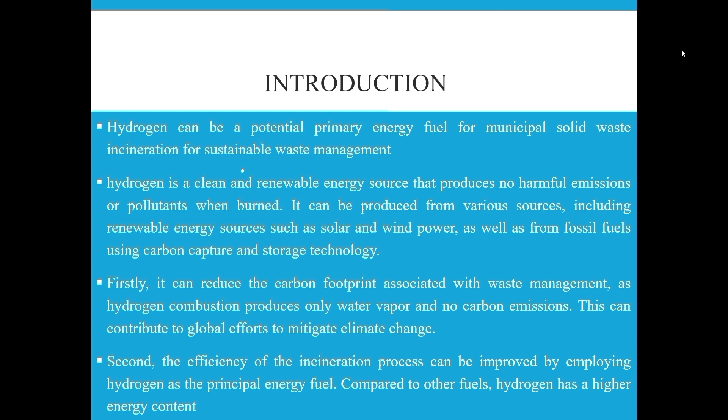Firstly, it can reduce the carbon footprint associated with waste management as hydrogen combustion produces only water vapor and no carbon emissions. This can contribute to global efforts to mitigate climate change. Second, the efficiency of the incineration process can be improved by employing hydrogen as a primary energy fuel. Compared to other fuels, hydrogen has higher energy content.

Hydrogen provides more energy for each unit of fuel used. As a result, there may be greater ability to recover energy from municipal solid waste and a lesser need for fossil fuels. Managing solid waste is one of the most important tasks for municipalities and organizations.

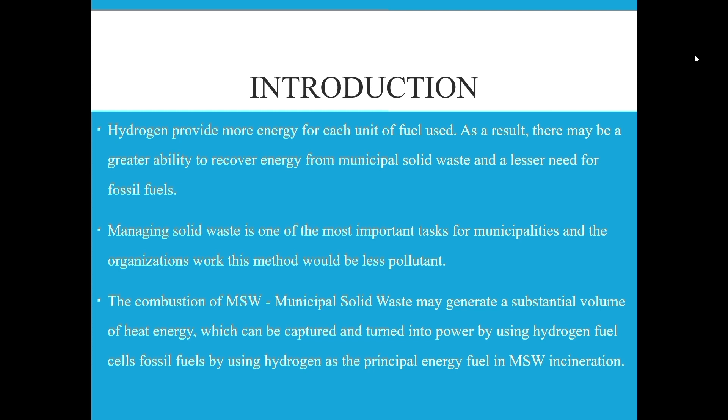This method would be less pollutant. The combustion of municipal solid waste may generate a substantial volume of heat energy, which can be captured and turned into power by using hydrogen fuel cells, replacing fossil fuels by using hydrogen as a primary energy fuel in MSW, that is municipal solid waste incineration.

History of technology. The history of this idea can be traced back to the early 2000s, when the Indian government recognized the need for sustainable waste management practices and began promoting the use of alternative energy resources such as hydrogen.

In 2017, the Indian Institute of Technology, Delhi, conducted a study to evaluate the feasibility of using hydrogen as a primary fuel for waste incineration. The study found that using hydrogen could reduce the emission of carbon dioxide and other pollutants, while also increasing energy efficiency.

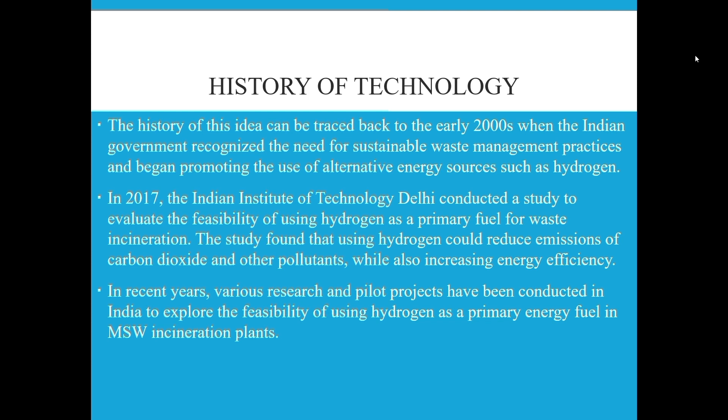In recent years, various research and pilot projects have been conducted in India to explore the feasibility of using hydrogen as a primary energy fuel in MSW incineration plants.

Literature survey, first paper: Waste to Energy Technologies Using Multi-Criteria Decision Analysis for Municipal Solid Waste Management. The advantages are that waste to energy technologies can reduce the volume of municipal solid waste and the need for landfill space. A disadvantage is there may be concerns around emissions and environmental impacts associated with waste to energy technologies, including air pollution, greenhouse emissions, and ash disposal.

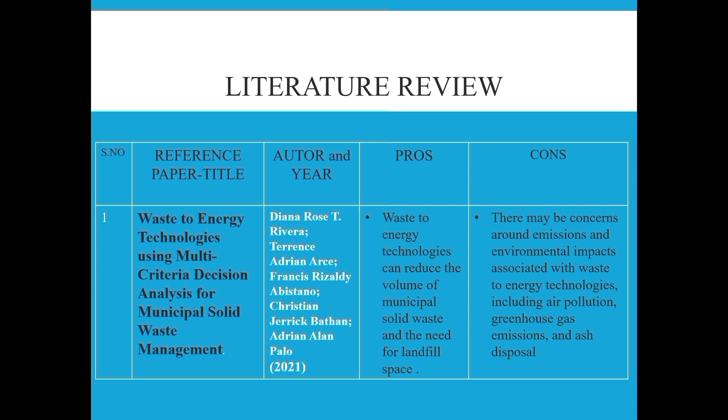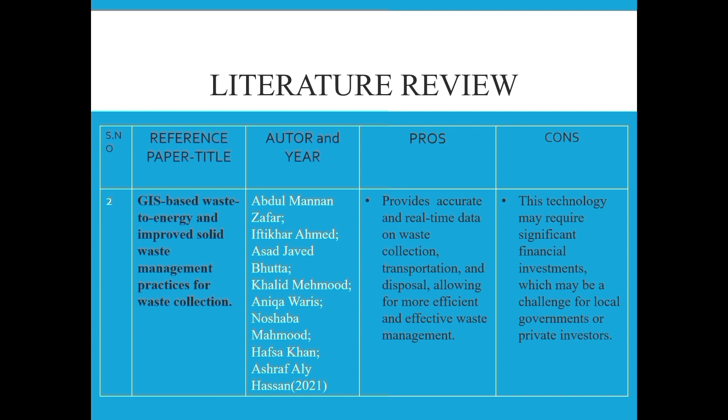The second paper is GIS-based waste to energy, improved solid waste management practice for waste collection. The advantages are it provides accurate and real-time data on waste collection, transportation and disposal, allowing for more efficient and effective waste management. However, this technology may require significant financial investments, which may be challenging for local governments or private investors.

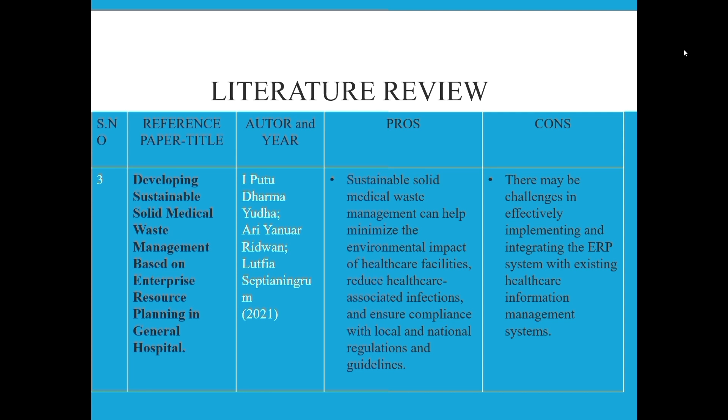The third paper is about developing sustainable solid medical waste management based on enterprise resource planning in a general hospital. The advantages are that sustainable solid medical waste management can help minimize the environmental impact of healthcare facilities, reduce healthcare-associated infections, and ensure compliance with local and national regulations and guidelines. The disadvantages are there may be challenges in effectively implementing and integrating the ERP system with existing healthcare information management systems.

Methodology. The use of hydrogen as a primary energy fuel can improve the sustainability of the process as it produces fewer greenhouse gas emissions compared to traditional fossil fuels. Here are the steps for municipal solid waste incineration for sustainable waste management using hydrogen as a potential primary energy fuel. First, waste collection.

The first step is to collect the municipal solid waste from households and businesses in the area. The waste is sorted to remove recyclable materials such as plastic, paper, and other material.

Waste preparation. The municipal solid waste is then prepared for incineration by shredding and grinding it into small pieces. This process helps to increase the surface area of the waste, making it easier to burn.

Incineration. The prepared municipal solid waste is then burned in a large incinerator. Hydrogen gas is used as the primary fuel for the incinerator. The heat generated by burning the waste is used to produce steam, which drives a turbine to generate electricity.

Emission control. The emissions from the incinerator are controlled using combustion scrubbers, filters, and electrostatic precipitators. This technology helps to remove pollutants such as particulate matter, sulfur dioxide, and nitrogen oxide from the emissions.

Energy recovery. The heat generated by the incineration process is used to produce steam, which is then used to generate electricity. The electricity produced can be used to power homes, businesses, and other facilities in the area.

Ash management. The ash generated from the incineration process is collected and disposed of in an environmentally responsible manner. The ash may be used as construction material or disposed of in a landfill.

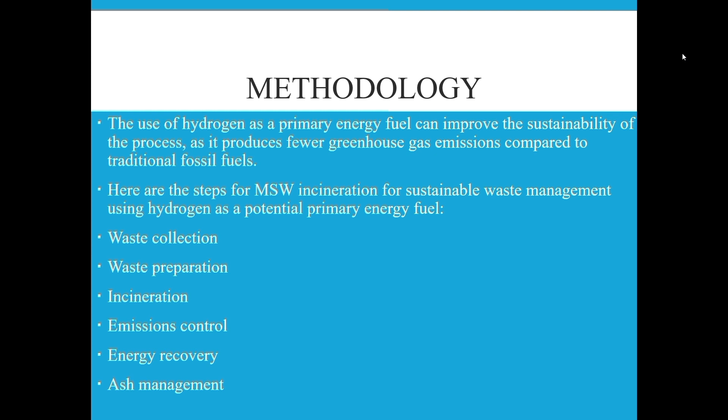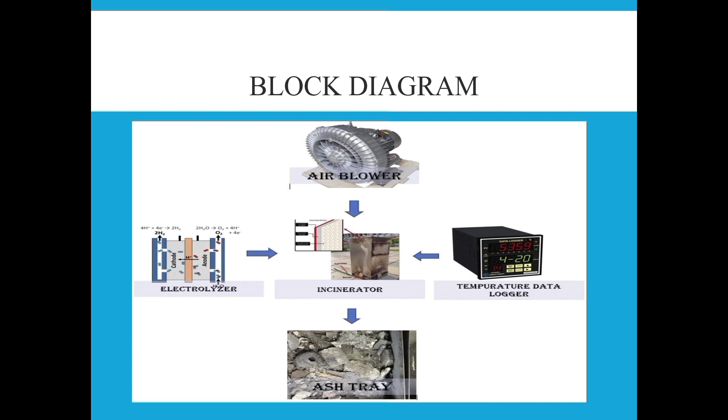Ashtray is used to collect the ash after the incineration. Incinerator is a combustion chamber where all of these inputs go and burns the municipal solid waste.

In the flowchart, water is passed through the electrolyzer which gives hydrogen and oxygen. Hydrogen is given to the incinerator through the air inlets. The burner is used to burn the municipal solid waste, which is given as input.

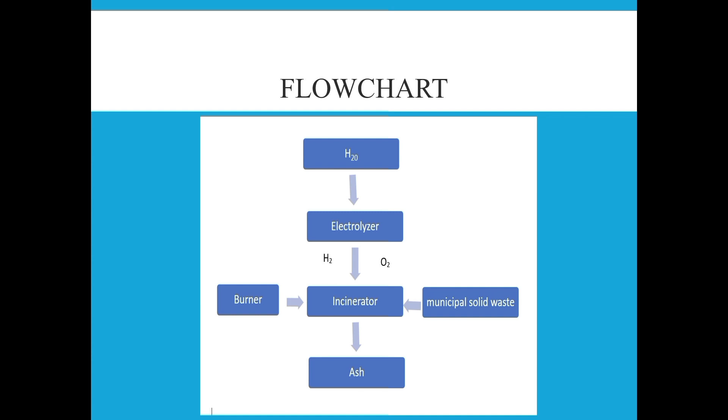After combustion, the incinerator gives ash as output, and the energy generated during combustion is used for heat generation, power generation, and many more.

Hydrogen as a potential primary energy fuel for municipal solid waste incineration has various applications that can contribute to sustainable waste management. Some of these applications include electricity generation, heating, transport fuel, energy storage, chemical production, and hydrogen fuel cells.

Electricity generation: hydrogen can be used to generate electricity by fuel cells or combustion engines using hydrogen generated from MSW. This can produce electricity without generating additional greenhouse gases, thereby reducing carbon emissions and contributing to sustainable waste management.

Heating: hydrogen can be used for heating purposes, either for industrial processes or residential heating. By using hydrogen generated from municipal solid waste, we can produce heat without generating additional greenhouse gases, contributing to sustainable waste management.

Transport fuel: hydrogen can be used as fuel for vehicles powered by fuel cells or combustion engines. Using hydrogen as a transport fuel can reduce air pollution and greenhouse emissions, contributing to sustainable waste management.

Energy storage: hydrogen can be stored and used as a backup energy source for intermittent renewable energy sources such as solar and wind. By using hydrogen generated from municipal solid waste as an energy storage medium, we can increase the reliability and resilience of the renewable energy system, contributing to sustainable waste management.

Chemical production: hydrogen can be used as a raw material for the production of various chemicals such as ammonia, methanol, and hydrogen peroxide. By using hydrogen generated from municipal solid waste, we can produce chemicals without relying on fossil fuels, reducing carbon emissions and contributing to sustainable waste management.

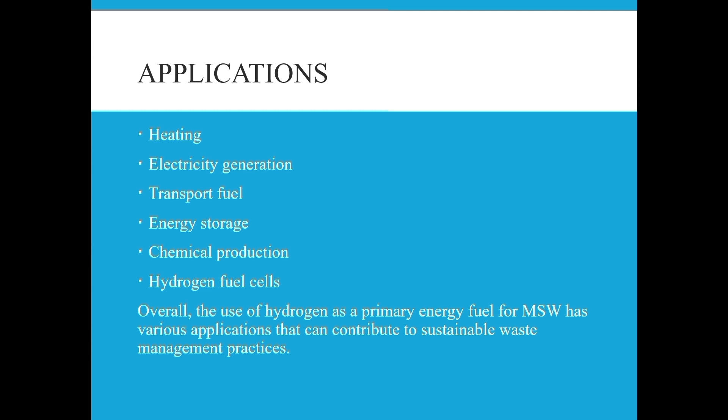Overall, the use of hydrogen as a primary energy fuel for municipal solid waste has various applications that can contribute to sustainable waste management. As a potential primary energy fuel for municipal solid waste incineration, it has several advantages, including clean energy.

Hydrogen is a clean burning fuel that provides only water as a byproduct when combusted, which reduces harmful greenhouse gas emissions. Renewable energy: hydrogen can be produced from renewable energy sources such as wind and solar power, making it a sustainable and environmentally friendly energy source.

Energy efficiency: hydrogen has high energy content per unit weight, which means it can provide more energy for the same amount of fuel compared to traditional fossil fuels.

Reduced dependency on fossil fuels: by using hydrogen as a fuel, we can reduce our dependence on fossil fuels, which are a finite resource and can have negative environmental impact. Increased energy security.

Hydrogen can be produced domestically, reducing dependence on foreign sources of energy and increasing energy security. Versatility: hydrogen can be used in a wide range of applications including power generation, transport fuel, heat generation, and chemical production.

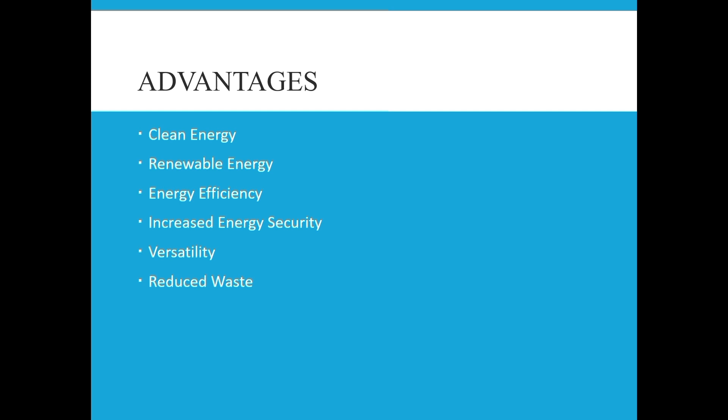Reduced waste: by using municipal solid waste as a feedstock for hydrogen production, we can reduce the amount of waste that goes to the landfills, contributing to sustainable waste management.

The results: the figure shows the testing of the flame length of the burner with different orifices. Left side shows the visible image and right side shows the FLIR image. A shows the burner with an orifice of 0.4 mm, B shows the burner with an orifice of 0.5 mm, C shows the burner with an orifice of 0.6 mm, and D shows the inside view of the incinerator with burning flames.

In figure 4 we have seen the residue sample of 7 different incinerated wastes under test. B shows a sample heating in the oven for calculating the moisture content of fly ash, and C shows a sample heating in the muffle furnace for calculating the loss on ignition of waste residues.

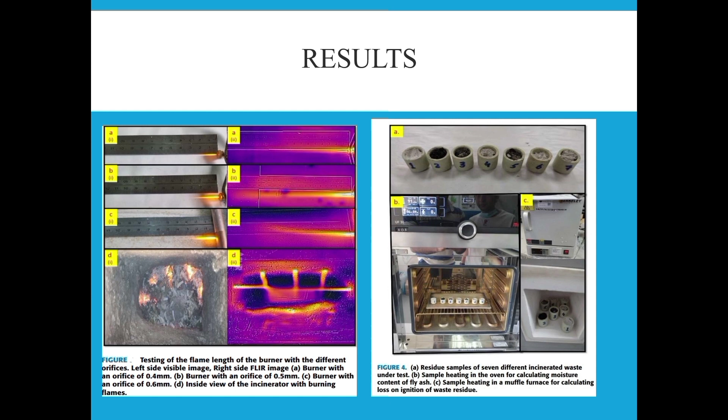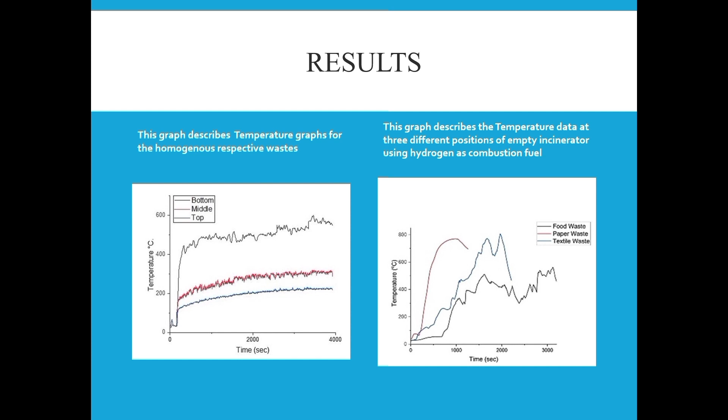The graphs shown describe the temperature graph from the homogeneous respective wastes. Here we calculate the different types of wastes homogeneously to get the particular graph. The second graph describes the temperature data at 3 different positions of the empty incinerator using hydrogen as combustion fuel.

Conclusion: the study examines the feasibility of using hydrogen as a primary fuel for waste management using a shaft-type waste incineration chamber with specially designed burners. Different combinations of solid waste with varying moisture contents were used.

The results show that a maximum temperature of 850 degrees Celsius was achieved for municipal solid waste with 77% moisture content, and 68 liters of hydrogen was consumed for 1 kg of municipal solid waste, translating to 204 Wh of energy consumption. The reduction in weight and LOI of treated waste were within 86 to 94% and 1.74% to 6.41% respectively.

Meeting incineration performance standards, the system worked efficiently for diverse municipal solid waste with a maximum moisture content of approximately 80%. High moisture content required more hydrogen and time, and moisture content of 90% reduced performance. The temperature and concentrated flame of hydrogen contributed to optimum performance at high moisture content.